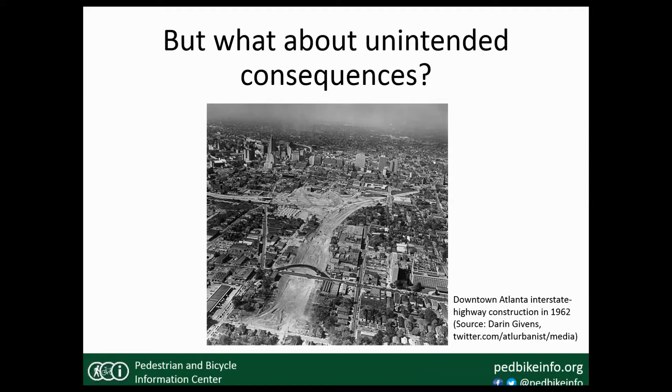So as the revolution in automation continues, it's very important for us to be mindful of not only the potential benefits for different road users, but to think about some of the potential unintended consequences and how pedestrians and bicyclists may be impacted. So for example, how will the nature of roadway crashes involving pedestrians and bicyclists change as we have higher levels of automation and more driverless vehicles that are on the road?

Perhaps we might see fewer human driver errors, but we might see more problems attributed to failed technology systems or glitches in vehicle programming, or perhaps the human drivers that really don't understand when and how they should be appropriately using their automated features. In the long term, we may also see people adapting to automated vehicles and changing the behaviors and the ways that they walk and bike and look for and communicate with traffic. And so that might contribute to new problems as well. So thinking about these issues now will help us to mitigate them on into the future.

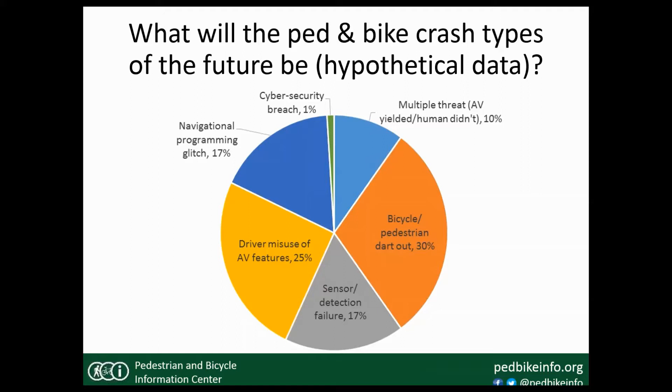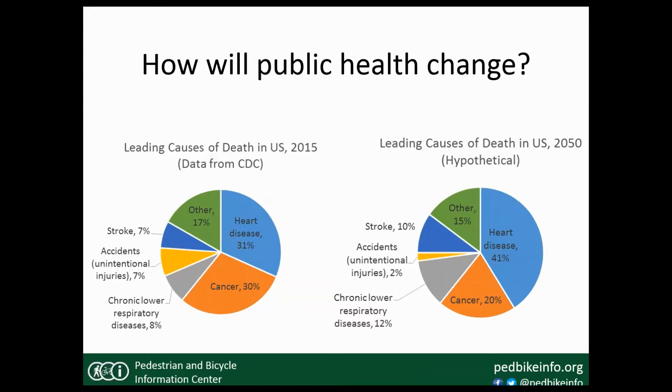Another important question is how automated vehicles will impact public health. Perhaps, if you look at the data from 2015 and then think about where we will be in another 20, 30, 40 years, we might actually see improvements in safety and reductions in unintentional crashes and injuries. But if we end up seeing more people spending sedentary time in these vehicles because the vehicles are so much more attractive than walking to transit or than biking, then what other public health problems will emerge? Will we start to see a rise in heart disease stemming from obesity? And what do we need to be thinking about to balance some of these concerns?

And of the literature that's out there, if you take a look at it, it often treats pedestrians or bicyclists in a very superficial manner, categorizing them as very similar to objects or roadside hazards that need to be avoided or moved around quickly, rather than thinking about the complexities of pedestrians and bicyclists, their human motivations, what might predict their travel, how they can interact and communicate with automated vehicles, unlike other types of roadside hazards that vehicles may need to be programmed to work around.

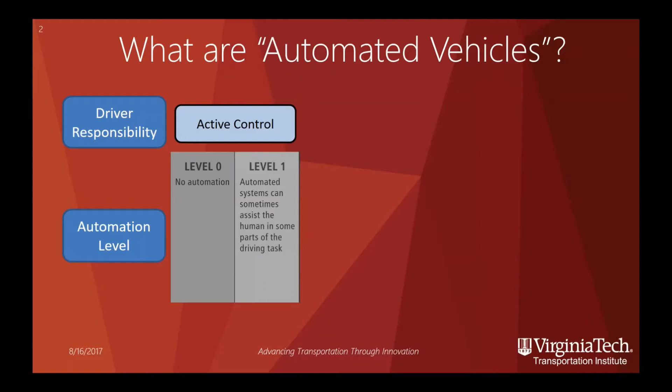So when we move up to level 2 and level 3 automation, what we think of as partial or conditional automation, these are automated vehicle systems where the system can take over some aspects of the driving task some of the time, but is not able to fully drive without human intervention at all times or in all situations. So for example, the Tesla Autopilot that most of you are probably familiar with is a level 2 system, which means that under certain conditions, usually on the highway, it can control steering behavior and/or speed/longitudinal control behavior, but the person behind the wheel has to be responsible for monitoring the environment and potentially taking back over control of the vehicle at any moment if the vehicle begins behaving unexpectedly or if it gets into a situation that it's not designed to handle.

Level 3 is more automated yet, but there are still likely to be conditions that a level 3 system cannot handle, and it will still have to hand control back over to the driver, albeit with a little bit more notice than a level 2 system. But the driver still, for example, can't be taking a nap or be entirely zoned out from the driving situation. So they're still responsible for being aware of and monitoring the driving environment. Next, Dan.

So finally, we get to level 4 and level 5, which we can think of as highly or fully automated systems. And these systems are what we can often think of as the full self-driving cars. So for level 4, they're self-driving within a very limited, perhaps geofenced zone. So we can think of this as perhaps a bus on a very limited route. Whereas level 5, we can think of as a vehicle that is fully self-driving, a full autonomous car that can take you to grandma's house and back over any roadways you can think of. And so for level 4 and level 5, this is what people often think of with autonomous vehicles or automated vehicles.

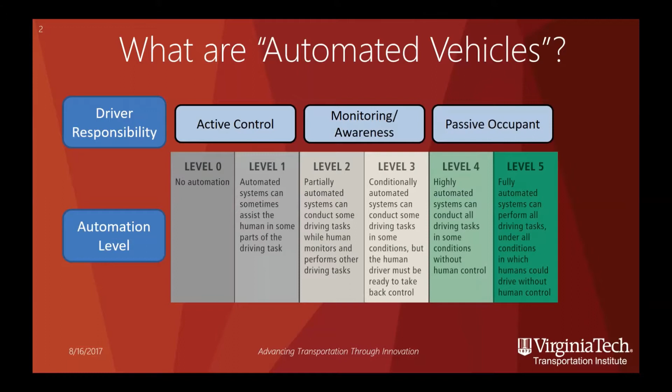Great. So from a positive perspective, we can think of a lot of potential safety benefits for vulnerable road users, such as pedestrians and cyclists, with the advent of full automation, but also with partial automation. So as Laura said, we can imagine that there could be improved perception compared to human drivers. Go ahead, Dan, next. So the improved perception, the ability to detect vulnerable road users in the world, particularly possibly at night, depending on what systems are being used. Go ahead, Dan. Or potentially even with occlusion. So by that I mean cases where somebody may be about to emerge from behind a parked car.

So these are cases, bad environment or occlusion, nighttime, where it is particularly difficult for the human perceptual system to be able to detect and identify vulnerable road users out in the environment. And this is an area that's very difficult from a technical perspective, but has the potential for great improvement with automation and connectivity. Go ahead, Dan. Also, automated vehicle systems aren't likely to suffer from distraction, fatigue, emotions like anger or sleepiness or sadness. So in this case, they may be able to perform better over long periods of time or in challenging situations than human drivers can. Go ahead, Dan.

They're likely to have faster reaction time. They don't have the human perception response system; the time that it takes a human to see, identify, predict, and react to an adverse event in the environment or to a pedestrian is likely to be significantly shorter with computer technology. Go ahead, Dan. There are likely to be improvements in efficiency, both on roadways in general, but also from a pedestrian and bicycle specific perspective. We can think about improvements in the efficiency of flow at intersections. We can even think about potential intersections of the future that may not have stoplight control, that pedestrians would not have to wait through several light cycles to cross, that they may be more reactive to pedestrian needs. Go ahead.

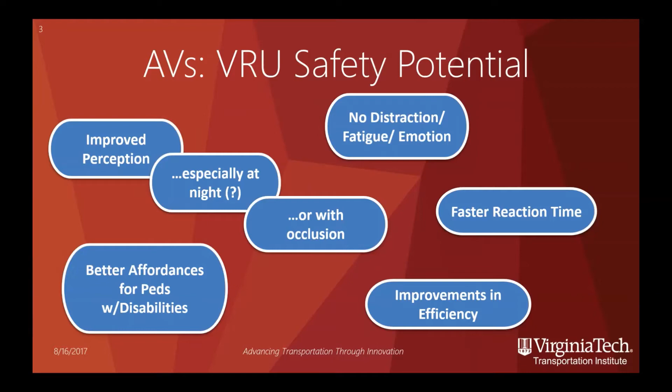Go ahead, Dan. And finally, we can imagine that there will be significant improvements in affordances for pedestrians with disabilities as well as senior people. So pedestrians on the roadway who need added consideration for their mobility needs, and also the larger group of people with disabilities as a whole. The advent of automation may improve their mobility as a group, and this is a very important thing for the disability community. Next slide.

Okay, and this is one where I'm not sure if the animation is going to work, but this was designed to illustrate sort of an optimal current case scenario where we can imagine that the interplay between a driver-controlled vehicle and pedestrians on a roadway right now is a very social interaction. Oh, it works. So this is obviously a little bit cute and a little bit idealized, but you can imagine that at least in a lot of cases where pedestrians and drivers interact on the roadway, there's two-way communication here. So the driver may look, see a pedestrian, give a little wave and a nod and say, go right on ahead, it's your turn. The pedestrian may return that wave. And there's this communication that facilitates the safe movement of pedestrians and drivers.

Next slide. In fact, this is the basis of a lot of public safety campaigns. You can just tab through these, Dan. These are just examples that I picked off the web from all around the country, but making eye contact between drivers and pedestrians. These sort of scary ones are the tire tread across the face, make eye contact, not body contact. Make sure drivers see you, make sure you see the driver. List of things here to do, wait for traffic, make eye contact, so on and so forth. So this is sort of a fundamental way of interacting that's critically important right now to how people move safely through cities and country and beyond.

Now, if we think about a highly automated future, and again, here we're really jumping to level 4, level 5 automation, but this particular point holds true when we're not really clear about what level of automation a vehicle is under as well. Go ahead. We can see that as the vehicle and the pedestrians approach the intersection, it now moves from a bidirectional human communication to sort of a unidirectional human-machine interface problem now of both the vehicle and the pedestrians trying to understand the intentions of the other. And I'll come back to this in a couple of slides too.

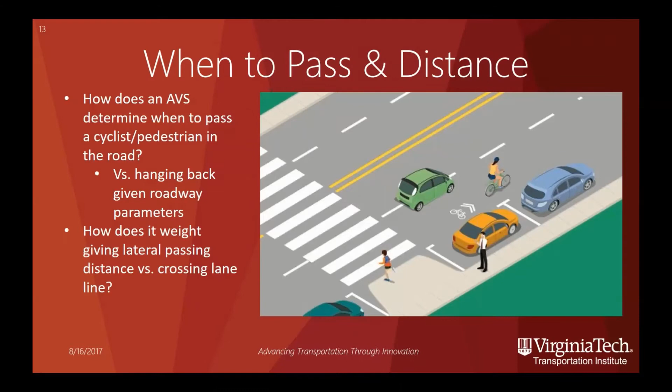So I'm running sort of short on time here. In fact, I may be beyond my time, but I just really wanted to touch pretty quickly on a few legal and ethical questions that apply to the overall domain of automated vehicle systems, but also in particular the play between AVs and pedestrians and bicyclists.

Under what circumstances can automated vehicle systems break the law? So in other words, you go ahead, Dan, to the next thing. But under what circumstances do we allow them to break minor laws or major laws? So for example, a minor law may be crossing over the center line, or that may be major in some circumstances, to allow safe passage of a bicyclist or pedestrian or a broken down vehicle in the lane. What about speeding, for example? Should automated vehicles be allowed to travel with the flow of traffic, even if that, as usual, violates the speed limit? Next.

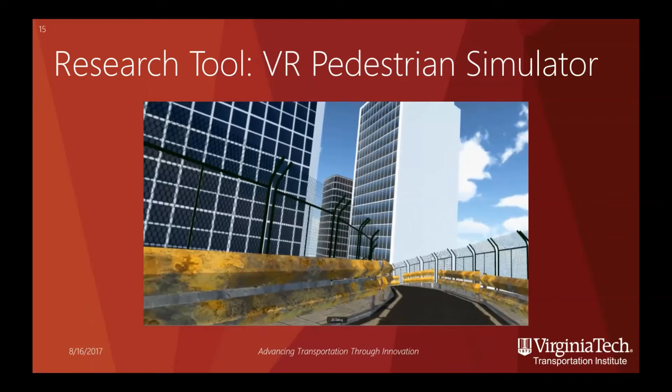But what this allows us to do is to develop different types of situations that we can put people in fully immersively, where they can look around and walk around, and allows us to really look at different combinations of environmental factors, roadway factors, and driver or automated vehicle factors to try to investigate the world of human factors related questions that we've talked about here and that we'll continue to talk about for the next hour or so, that I think is really important. Go ahead.

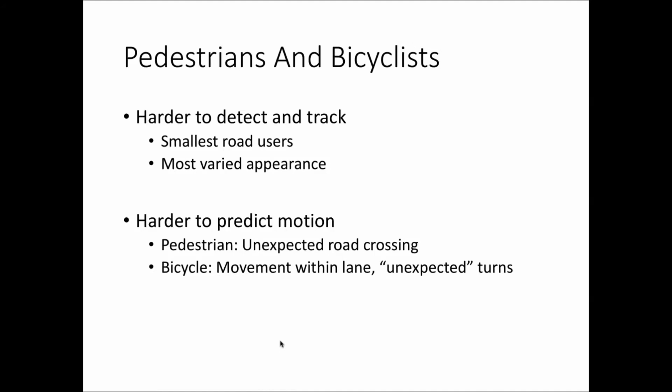For the cyclist, a lot of the problems are related also with movement within the lane. Since a bicyclist is relatively smaller than the lane, it can shift from being in the middle of the lane to being more on the right side when it's expecting the car to pass, to being more on the left side if it wants a left turn. And so those can be tricky for the autonomous software.

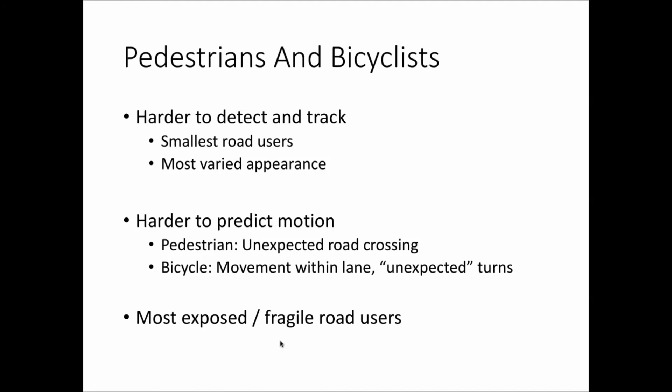And then also, of course, they're the most exposed or fragile road users, so that just makes everything even harder. Because it's really the case where a mistake is not a fender bender, a mistake is really someone going to the hospital. And so this is the main problem.

I just have a brief overview now of some of the work we did. I'm calling it the intelligent mobility meter. We just put hardware and software to record bikes and pedestrians. We did it to tackle a specific problem here in the city of Pittsburgh, where we wanted to estimate the usage of dedicated bike lanes, and the other problem where we wanted to evaluate the impact of adaptive traffic lights on pedestrian wait times.

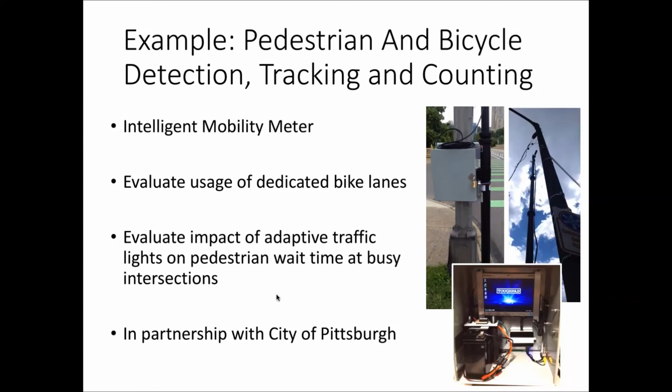And this is a very small project. So just think of the scale of what we have to have for autonomous vehicles. You know, many times the scale of data that we had for this project.

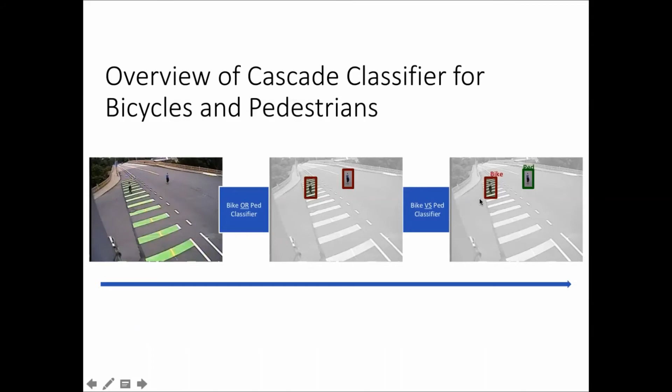So this is an overview of how it works. It's very high level. We have a bike or pedestrian classifier that just finds road users in general, both bikes and pedestrians, and then we have a classification step where we distinguish bikes from pedestrians. And finally, just a brief video of some results that we got.

Dan, can you just confirm that this video is coming through?

Sorry, I was on mute. Yes, it is coming through.

Okay, great. So this just gives you an example of our system tracking bikes, tracking pedestrians, and this is actually being used to count bikes and pedestrians crossing this red line here. I'll just play it back from the beginning because this part is more interesting.

And this is the same type of thing that, for example, a car camera needs to be doing in real time, at least for the ones that are close by. As pedestrians are close to the car, you need to track them and try to figure out where they're coming from and where they're going. So this example of bikes and pedestrians classification, detection, and tracking gives you a little bit of a flavor. Oh, by the way, our overall accuracy for our system was 95%, which is pretty good for a counter.

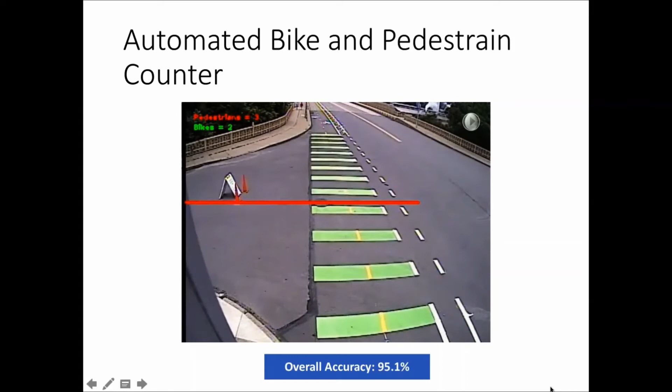So let me give you a little bit more insight on why I think the race to autonomy is actually becoming a race to data sets, or more data. Oftentimes, when you think about the system, for example the system that we use to learn where the bikes and pedestrians are and count them, this is, like I said, a machine learning system. So its performance, its success rate, is going to depend largely on the quantity and quality of data. That's why we had to have 1 million images to train it.

Now, if that's the primary driver, then it means that you have numerous startups and even established manufacturers all vying to collect data sets big enough to train their machine learning systems, to be able to find pedestrians, to be able to perceive the world. And a particular example that I think is relevant for this conversation is that Tesla is actually having its customers that drive Tesla cars send back the data to Tesla headquarters.

So, for example, in May 2016, more than a year ago, Tesla already had 780 million miles of data. These were millions of miles driven where the sensors capture the data, and we also have the commands that the driver gives to the car. So this was not self-driven. This is just the database that can be used to learn how to drive. And Tesla was collecting data at a rate of 1 million miles every 10 hours. So this is a really large scale.

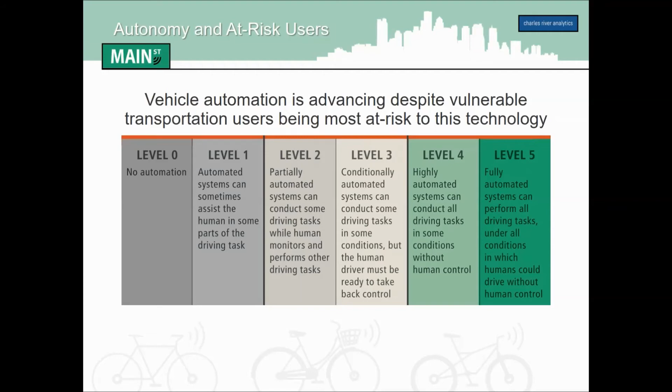So someone would sit at a stoplight like this, and every time the bike started rolling backward or stopped, the Google car would start to progress into the intersection. And then as soon as the bike started rolling forward, the car would slam on its brakes. So the car basically was sputtering through the intersection trying to figure out what this bike was doing. So this is the type of edge cases that make bikes so hard.

And really, what a lot of research is, and Bernardo pointed this out, bikes are the hardest use case for vulnerable transportation users, just because they're so light, they're so quick, they don't have a lot of mass to them, they're very swervy, and then people load them differently, so they have different images. So when you talk about the machine learning that was discussed earlier, there's so many example cases that have to be studied for a vision-based system to be able to detect this.

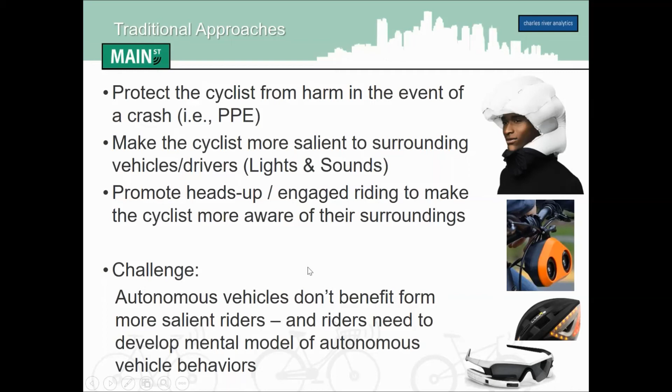So with AVs, if you're taking the driver out of the case, then these lights and sounds, as I mentioned, aren't going to help you. And the same thing for a cyclist, they're going to have a shifted mental model of how these vehicles are going to behave, which is something that for current riders and probably the next decade of riders, they're not going to be brought up learning that behavior. So that's a major shift that this technology is sort of going to fail folks on.

So you can go to the next slide. So what we're working on is MAIN STREET. It's an acronym, Multimodal Alerting Interface with Network Short-Range Transmission, because the government loves acronyms. But what we're focused on, as I mentioned, is this DOT effort where we're developing the technology to bring these bicycles onto the connected vehicle network. Just so everyone knows where we're at, right now we're 4 months into a 24-month effort. So what I'm presenting here is where we're at in terms of our prototype development, and then a little bit about where we're headed.

Third is how do we receive and parse these messages from other connected entities. Fourth is how do we use that data to then predict hazards for the cyclist, and then how do we warn the cyclist in an intuitive manner, bringing back what Justin called out, some of the human factor psychology, for how do we do this in an efficient way where you're not going to add to the danger of a potentially developing hazardous situation.

The second thing that we're looking at is automated cycling assistance systems. So a lot of you may have heard of ADAS systems, which are advanced driver assistance systems. So we're thinking about this and we're saying, okay, it's going to be a long time before connected vehicle networks are out there. And I think it was Justin that showed that chart where we're 20 years out for this being a thing. So what we want to do is say, okay, if we're putting this technology on the bike to enable a lot of this, can we actually take the capabilities that are being developed for cars and bring them to the bicycles? Because as I said, as Bernardo said, it's really hard to detect bikes with these systems.

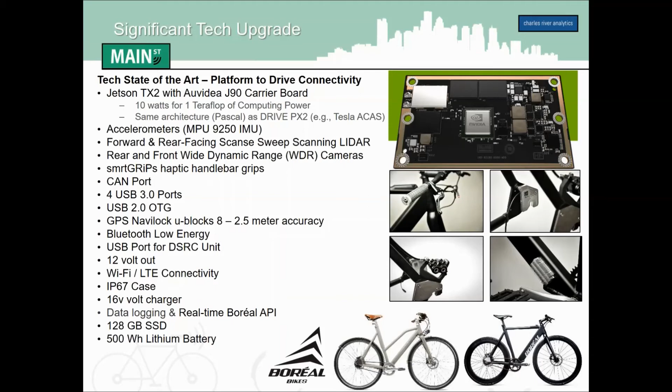So where we see this going first will be city deployments with bicycle share programs to start getting them out there and collecting data, and I'll talk to that a little bit in some of the subsequent slides. But I just want to point out that step one is let's see what we can do on a bike feasibly with technology, and then step two is going to be reducing that platform down to what's essential to provide the benefits. So you can go ahead and go to the next slide, Dan.

And you can see it performs pretty well, and this is using a little bit of modified code on our end where we've been training it. Bernardo talked to the problem of annotating all these images, so what we've actually done is we have an automated annotator that will go through large databases of images and then reduce the manual labor that's required to train it.

So obviously, we're not going to be implementing things like automatic braking where we stop the cyclist and throw them over the handlebars. But what we will talk about in some subsequent slides is how we can use this information to provide more information to increase their situation awareness so that they are better equipped to respond to the riding environment as it's evolving.

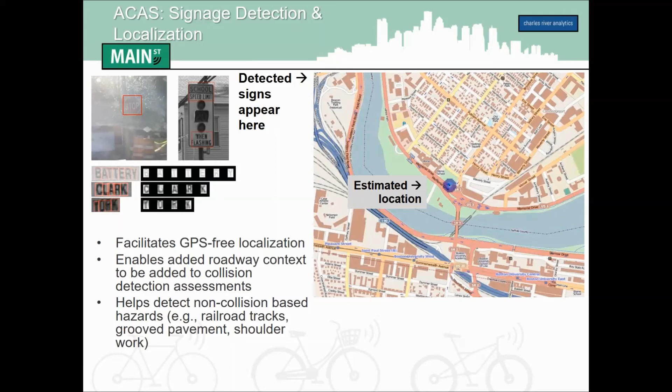So the real focus of our effort, and I'll be able to go through some of this pretty quick because we talked about it, is bringing bikes onto these short-range connected networks. So DSRC, or Dedicated Short Range Communications, is the technology that the DOT is sort of backing at this point. I don't think they officially endorse it, but I think it's the technology that is winning out, and the SAE standard is promoting it.

So right now, this is the wireless communication technology designed for safety applications and communication between different vehicle and infrastructure devices. And really the benefit is it's going beyond just promoting awareness, it's trying to automate it. So this is how we think we can overcome some of the vision-based automated vehicle problems. So it's very low latency, it's useful in high vehicle environments, so you can be broadcasting. The standard requires, I believe, 10 times a second, so it's very quick broadcast, and it's immune to extreme weather conditions.

So it's not based on vision-based sensors, so as long as the signal is getting through, and you can use infrastructure-based repeaters to make sure that you're getting that, you'll be able to tell where things are and send a lot of information to one another in these very detailed message sets that I talked about.

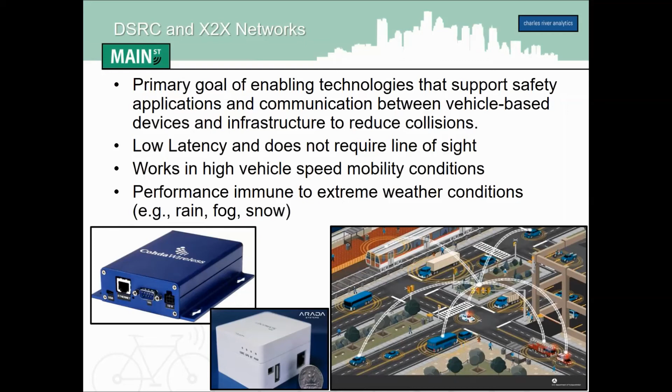So what we're focused on is, because this SAE standard doesn't address bicycles beyond just messages saying there's a bike lane here, we wanted to start building the technology so that when these networks get rolled out, bicycles can be considered. It's fantastic that vehicles are starting to take advantage of this technology and infrastructure as well, but some of the vulnerable users, such as cyclists, are the folks who arguably need this the most, especially because with current AV technology, they are the hardest to detect. So thinking through how we can make that problem easier is an important one to solve. So you can go to the next slide, Dan.

So in terms of actual connectivity, we're not focused on the hardware as much as the software. Commercial off-the-shelf radios are continuing to reduce in SWaP, so size, weight, and power. They're getting smaller, they're getting reduced power, they're becoming lighter. That's something that industry is pushing from a vehicle perspective. A lot of the vehicle stuff now is USB powered. It's not much smaller than, say, a couple iPhones stacked on top of each other.

And it's becoming a lot easier to get these onto bikes, especially with e-bikes becoming more prolific, especially if we think about what's happening over in Europe, seeing those trends here. I know there's at least a few ride shares throughout the US that are now deploying e-bikes as well. That'll largely solve our power issue, and other ones can be solved by deploying either small battery packs that have to be recharged after a couple rides, because these are low power, or just generators on the bikes themselves, like people use to charge their iPhones currently anyways.

So we're focused on the software, and really what we're looking to do is being able to generate a safety message for a bike, so helping to define what that standard is so we know what's being broadcast out, and then being able to source that information when you're on a bike. A bike, unlike a car, doesn't have a full computer system that's monitoring all its systems at once, and then being able to source that and broadcast it.

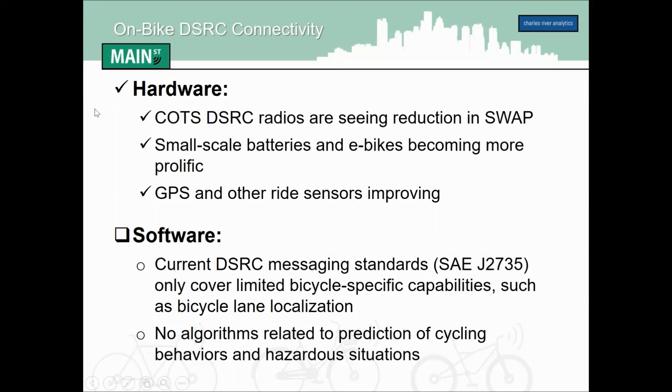And then also taking into consideration how do we actually identify hazards for a cyclist, because they're such a unique class of transportation user, where they're using different positions in a lane similar to a motorcycle, but also have the ability to leave the road at any time and go onto a sidewalk. They have dedicated lanes, and they have different types of behaviors than you'll see with other transportation users. So starting to model those behaviors and use that information in conjunction with what we do know about cars to detect hazardous situations. You can go to the next slide, Dan.

So we're looking at this as a tiered approach, and the first tier is arguably the most important, and what that's focused on is just getting the state information about the bicycle out into the environment. The cyclist doesn't even necessarily know it's there, but we're broadcasting information on you so that other vehicles can use their advanced multi-million-dollar capabilities to avoid you. And there's two modes that we're exploring in our effort.

The first is our bare bones version, where you just have a radio and a GPS. You can't source much from that, but you can source some pretty critical elements. Position, heading, and velocity are things that are pretty easy to get from GPS. So being able to take that, translate it into the format that these other receivers need, and then broadcasting it out so that they know your location, and doing that at a frequency that's required for the standard. And then mode 2 is using our tech equip package.

So what can we do if we have a bike that has more sensors built into it? All the mode 1 GPS stuff, but then adding IMUs, mechanical sensors, and a more precise GPS system. This allows us to get additional data elements, so things like acceleration, braking status, lane position, power and gear stuff, turn state. There actually is the ability to turn signal, so with the bike we're building, the rider has the ability to input when they're signaling, or you could put an IMU on the rider, like a smartwatch or something like that.

And then just general bicycle system state, so the bike could actually broadcast out if their radio isn't working for receiving messages, so that the other vehicles know what's going on with the bike. So providing more robust messages, so cars and other vehicles and infrastructure have more information to operate. But at the bottom there, just calling out, tier 1 is letting everyone else know what you're doing, so that they have the burden of responding to you appropriately. You can go to the next slide, Dan.

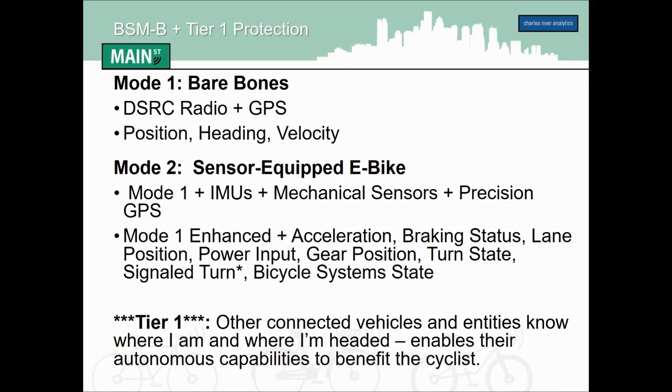So tier 2 is then focused on hazard detection. Really, we can turn these radios on, and we can receive all these messages coming in from the environment. 10 times a second from every vehicle and every other connected entity in the environment is a lot.

So it's only valuable if you can do something useful for them, for the cyclists. So that's what we're focused on. So what we did is we actually used the Pedestrian Bicycle Crash Analysis Toolkit as a starting point to identify our vehicle-related crash scenarios. So some of them are highlighted here from that PBCAT tool. And then we've also identified a set of infrastructure-related crashes.

And what those are, you can think of those as, we're looking at historical data for bicycle crashes and looking at features of like an intersection that typically lead to an accident. Or we're looking at things just like how do you alert a cyclist effectively if their current glide path is going to put them at the light right when it turns yellow or red, and they're going to be in a situation where they either need to stop quickly or they're going to run the light when there may be a car coming. So coming up with the scenarios that we think based on these message sets we can actually detect. Using that and then incorporating road laws and road design information.

So what do we know about the road itself? What do we know about the lanes of travel and directions and rights of way to start building some basic alerting scenarios, and then assembling a picture of what's going on in the overall operating environment and having a sort of a real-time playback of that. So there's messages, for those folks who aren't familiar, that are coming just from infrastructure that deal with signal phase and timing for intersections, but then also that deal with map information.

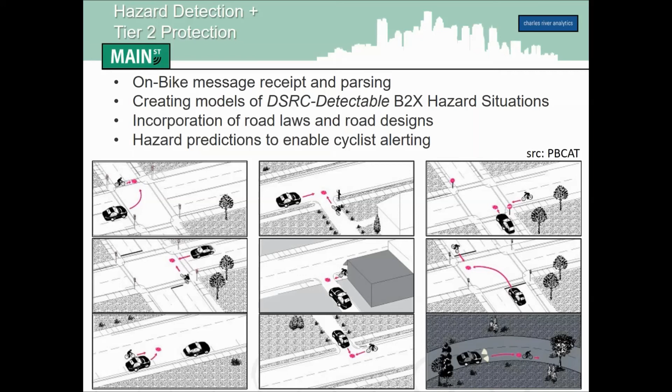So our goal here is to really build a picture, build that running estimate of what is our automated situation awareness, and then extracting from that, how do we tell when hazards are developing so we can appropriately start to alert the cyclist to those capabilities. So you can go to the next slide, Dan.

So in terms of alerting, what we're looking at right now is we're sort of taking a kitchen sink approach, and we're doing a multimodal approach. And the idea here is that these will need to be validated. So I want to caveat this by saying that we haven't tested these yet. We're just building the technology to support it. So the first, for visuals, we're working with a company called Smart Halo. On the lower left there, you can see their device is basically a ring that attaches to the handlebars.

It's got a 30 LED array, and then it has a speaker built in it too, and it's RGB, so you can do any color you want. So we're coming up with visuals that help to alert to different hazards as they're developing. Second, we're dealing with audio that actually comes through that as well. And then third, we're dealing with haptics. So on the right there, you can see these little grips that go into the handlebars, and they can do a full range of different signals through vibrations in the left and right handlebars. So you have the ability to do some localization as well.

So the idea here is learning from what we've seen in other domains. Display-free warnings, where the user doesn't have to interpret stuff, should result in shorter reaction times. And looking at accessories that could be retrofitted to existing bicycles. And then we're coming up with a plan to validate these, which we'll talk about in some of the later slides. But this is where we're really starting to take advantage of the DSRC from the cyclist perspective, where we can actually collect the information and then start to provide the highest priority information back to the cyclist so they are better equipped to act. So you can go to the next slide.

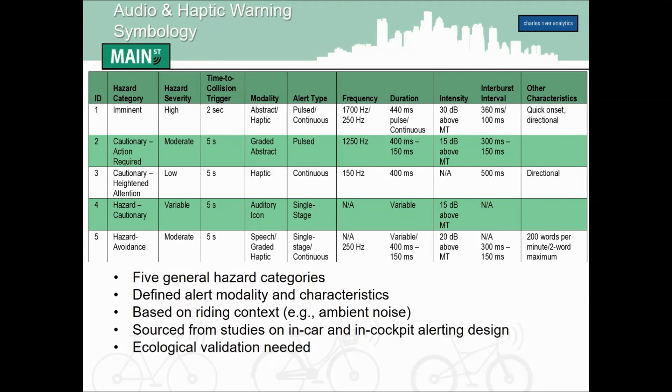So you can go to the next slide, where we talk about actually testing this stuff. So Justin showed their pedestrian simulator. This is our bicycle simulator. So the idea here, and I don't know how it looks to you guys, it might be a little choppy, but like Justin said, it's pretty smooth when you're running it in your lab. So we've outfitted a bike to basically allow you to ride around in a virtual environment.

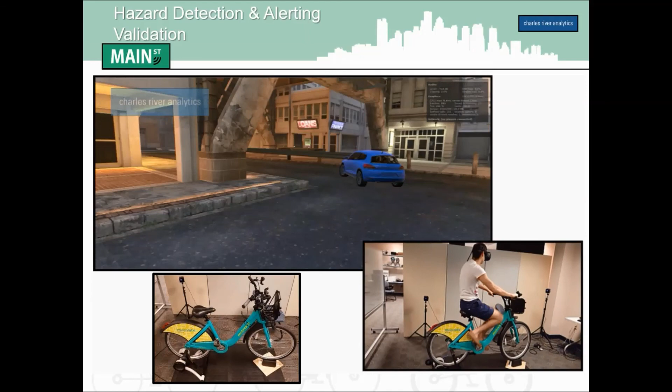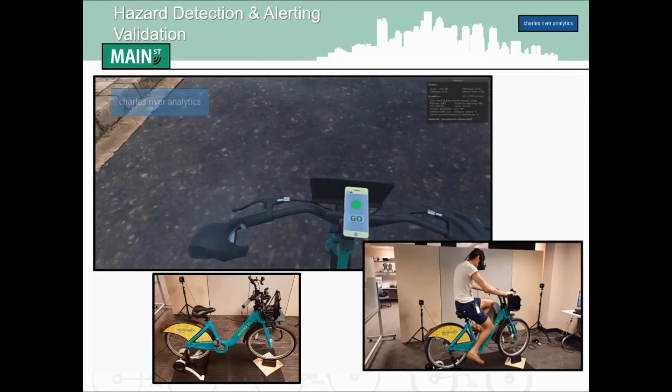And this mixed reality simulation allows us to do two things. So the first thing it's going to let us do is actually simulate different hazard scenarios and then test our alerting protocol. So you can see on the bike there's a smartphone where we can do some visual alerts, and then we're actually putting that smart halo into the sim as well. But then we can also play alerts in the real world, and we can actually vibrate the handlebars of the bike that you're riding to actually see how people respond to the haptics in response to what's going on in the virtual environment.

The other thing we can do, and the other thing we're working on, is actually building an arena where we can test the DSRC communications under real operating conditions to see how cyclists respond, to start to understand how to really generate these hazard scenarios. So what we're doing here is we're going to be collecting DSRC messages from infrastructure and from vehicles traveling around a real world environment, and we'll talk about on the next slide, we're looking at Las Vegas, where we take that data and we can actually feed it into our simulator that will be a representation of Las Vegas to then control the flow of traffic in the simulator.

So we can basically say, okay, let's collect data over an 8-hour time period in Vegas and use that as an input, so then we can basically play it back and ride a cyclist. So cyclists can then ride through the environment to experience it, and we can be broadcasting the DSRC messages to see, one, how that changes how cars would respond if they were autonomous at different levels, and two, to see how a cyclist responds if we were giving them alerts based on the algorithms we're developing.

So as the cyclist in the simulator is approaching an intersection, if a car is on path to hit them, we can use the DSRC messages in the simulated environment to generate an alert for them that would follow the timing they'd see in the real world, to make sure they're getting that alert at sort of an ideal time for them to respond without it turning into a collision or even a potential near collision. So that's what we're using the VR for, just as a way to sort of build this out and test these types of technologies in a more controlled environment. You can go to the next slide, Dan.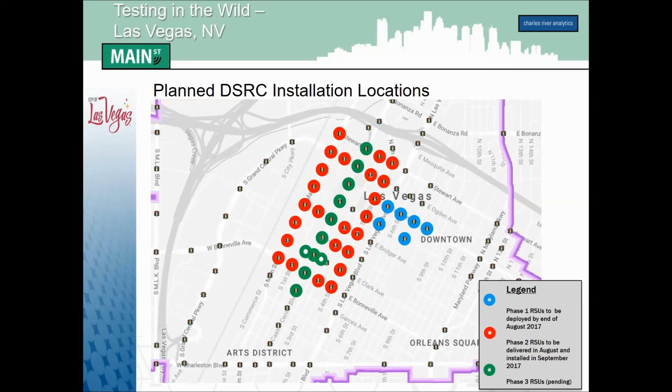So we're obviously not at the point where we want to be putting people in hazardous scenarios to see what happens, but this will allow us to ride in controlled scenarios and see if we're getting information at the right time, if we have any false alarms or if anything is coming up, and we can actually look at data in a more ecological setting. So the plan is to move forward as early as October to get these bikes out in the environment, and then start to iterate on what you find based on that.